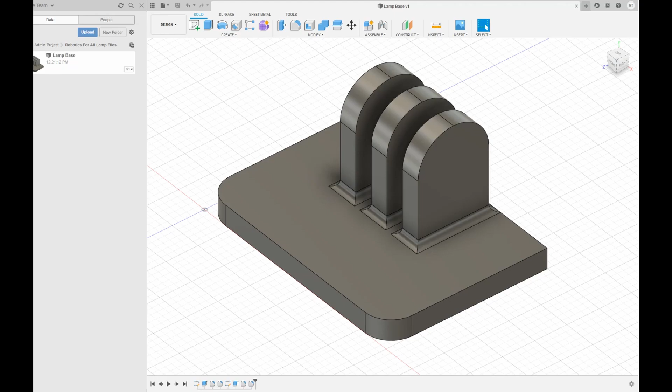This week we're going to learn about the process of assembly, which is taking various models you've designed and combining them into a finished product.

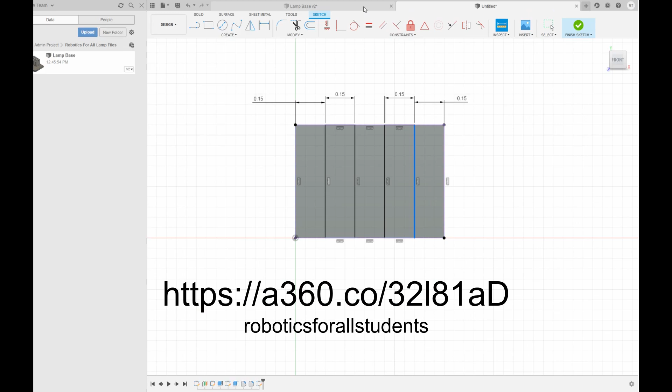In the video right now, you can see me designing the object I'll be demonstrating how to assemble. If you want to follow along, you can download the model from this link. The password to access this model is Robotics for All Students.

Now, there's a few schools of thought on organizing files for an assembly. The method I'm going to use here involves designing objects in separate files, then bringing them into a single file for the assembly. The advantage of this method is that you can create each object in a clean workspace, and you have access to the entire history of that object's design.

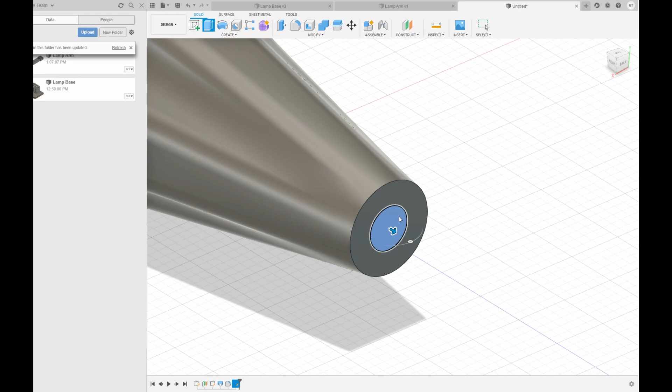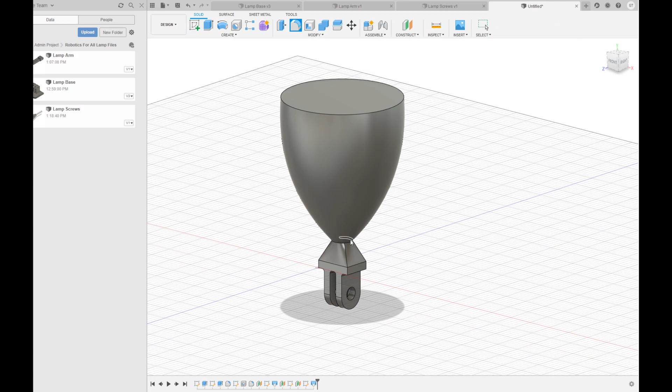Another method involves creating all the components for an assembly in a single project file, then joining them. This method makes sure that you will not have any missing links if a component is moved or corrupted, but you may lose access to that component's history. In this class, we're going to be using that first method for assembly, that way you can clearly see and modify each component before and during the assembly.

So here we have all the completed models for our lamp we're going to assemble today, but it looks like one of the arms is missing. We're going to need two of them.

So first of all, I'm going to show you how to insert a component in here. On the data panel on this side, you can see all the individual components. We have the arm, the base, the light, the nut, the screw, and the little name for it, as well as the file for our assembly.

Now, if I want to insert a component from a different file into this file, it's very simple. All I need to do is right-click and click Insert into Current Design. So let me do that. And here we go, we have a second one here.

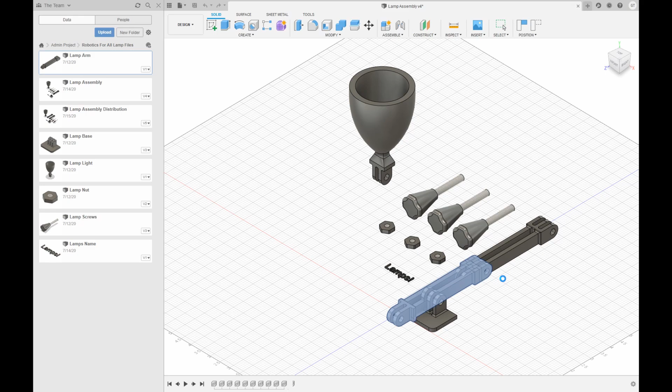Now, it's going to allow us to move it around, and it actually doesn't really matter where we put it, because we're going to constrain them together to complete the lamp. So I'm just going to put it beside it right there.

Now notice there's a chain link icon here beside every single component inside the hierarchy. That means it's linked to another file. So if we make a change in the original file, we can update the assembly to reflect that change.

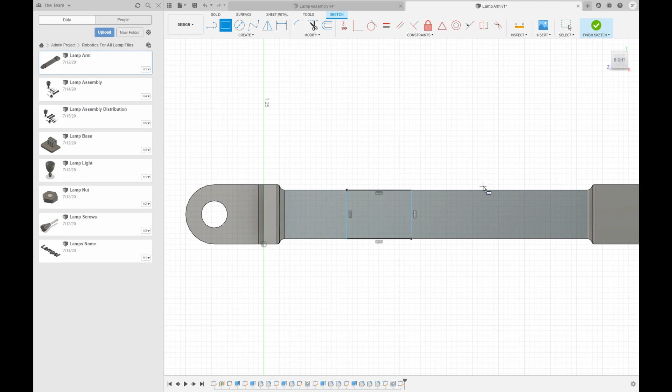So I'm going to demonstrate that really quickly. If I go to this lamp arm file here, and let me just make a quick extrusion on this side. Okay, now I've made a quick extrusion and a change on our lamp file here.

And notice, remember, we have access to the whole history of the file, so if I want to undo the change I just made, it's super simple. But watch, I'm going to keep this change here, and I'm going to save this file.

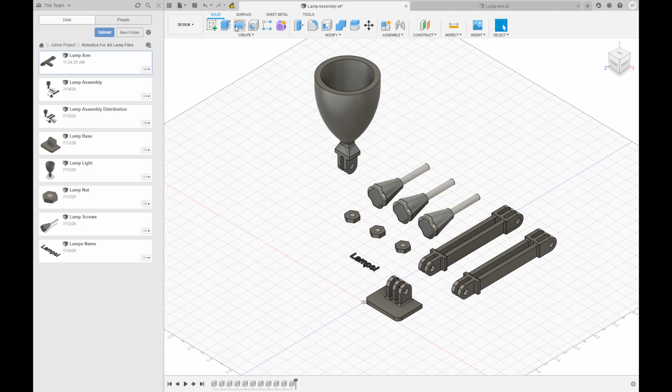Then, when I enter the assembly again, you're going to notice there's this exclamation mark above both of the arm components, and that means there's been some changes to those models, so we need to update it. There's a few ways we could do that, but the easiest way is to click this button right here. It says, click here to update all out-of-date references. So these references are out of date. We click it, and you'll see that they will update with that new little extrusion I made.

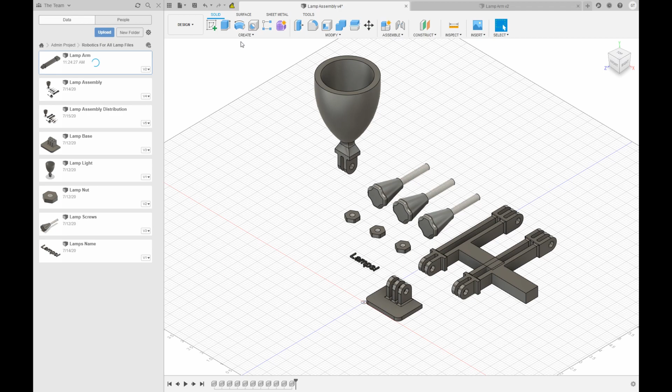Now, we don't really want that extrusion on there. It's not very helpful, so I'm going to go ahead and remove that. And you'll see if I remove that here, and then save my lamp file again, and come back in here, once again there's out-of-date references, so we click it, and they go back to normal.

Perfect. With all these components designed and laid out, I can now show you the different tools we use to assemble the components together. And in case you didn't know, the difference between components and bodies is that components can be freely moved because they have their own origin and degrees of freedom.

So all these pieces here are components because I can grab it and move it around freely. When we insert another design into a project, it's going to automatically become a component, and so we can manipulate it as a component.

Now, when we want to assemble the different components inside of a model, we want to go to the assembly menu right here. So there's a good number of tools here, so we're going to go one by one. So new component will create a new empty component, like I mentioned before, which you can use to create another model and make sure it's a separate component to the other components that might be inside your project.

But in this case, we don't need to use that. The ones we're really looking at today are going to be joint and rigid group.

So a joint is a tool that is used to connect two components together with some sort of particular behavior. A rigid group is similar, except it makes sure that their positions relative to each other are locked together.

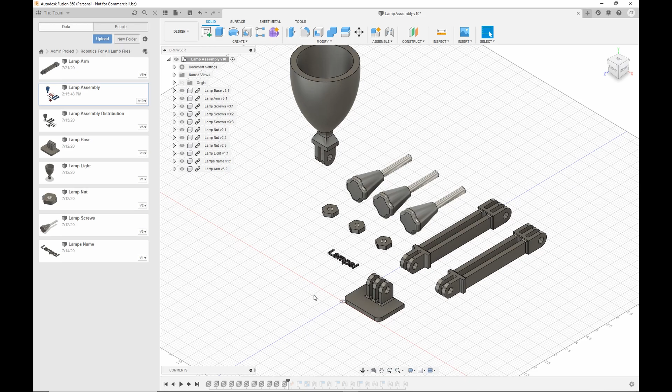Okay, now we have all of our pieces here in place, so we can now assemble our lamp model. The first step is to look at the base of the lamp here. This is the lamp base component, which we can find in our hierarchy. So what we want to do is ground it. I'm going to click the ground option right here, or I could also right click on it in the canvas and click ground.

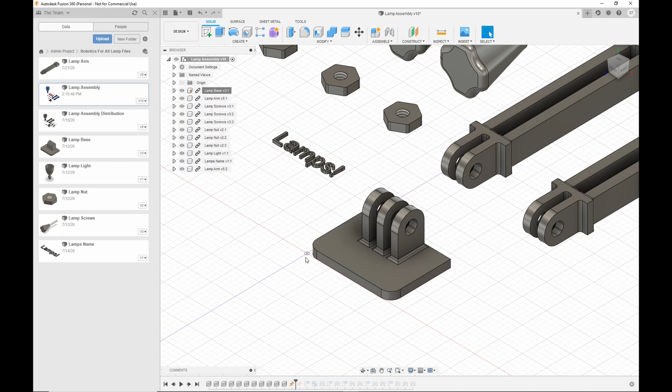What that's going to do is lock this piece in place so it can't be moved, and you can see it's grounded because of that little pin icon right there. It's important that we ground this piece because we don't want the base of the lamp to move at all. This is going to be a solid location where we can constrain everything else to, and it won't move.

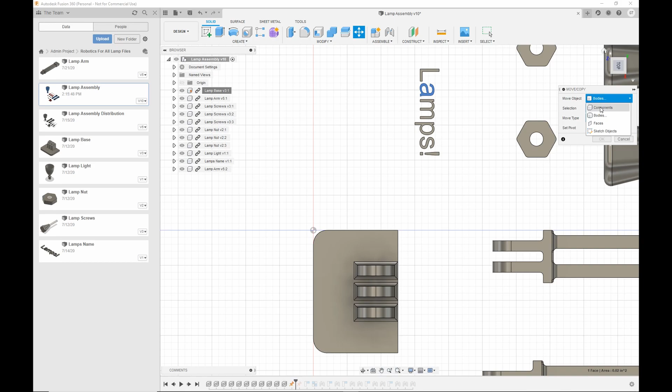The next thing we're going to do is take our lamp component here and constrain it onto the front side of our lamp base. So I'm going to go to the top view, get the move tool, and make sure we can select the entire component, not bodies, components. Now I can select this whole piece here. I'll use the square so I can drag it around, and I'll move it just here. Okay, now I'm going to check on this side. Let's rotate our view here.

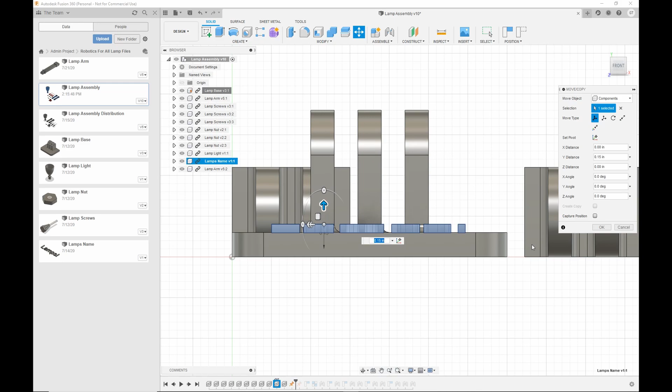Alright, yeah, we wanted to poke out just a little bit, so I'm going to drag it up. There you go, I'm going to click OK to confirm it. Now we've moved that lamp in place, but remember, we've only moved it, we haven't constrained it yet. So that means if I grab it, I can move it around, and that's not good.

So we want to constrain it together. How do we do that? Well, we're going to use the rigid group tool here. It's going to lock the position of our lamp to the position of the base. Because we moved the lamp around, it's going to ask us if we want to capture the current position or continue in the previous position. So we want to click capture position, and that means it's going to update the positions from what they were before to what they are now.

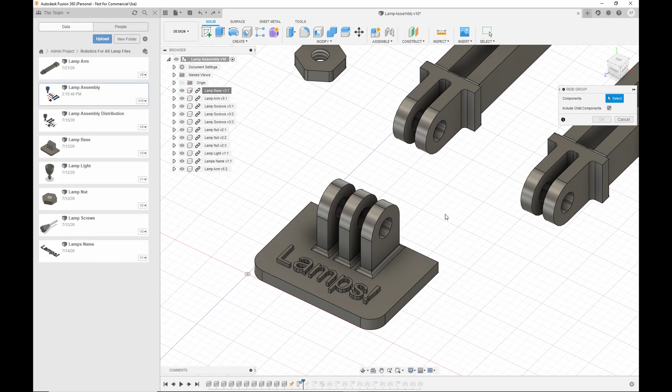Now we can select the components we want to become a rigid group. We want the base to be in a group with the lamp, and click OK, and now they're grouped together. You're not going to see any visual change, but you'll notice that I can't drag the lamp around anymore. The reason is, remember, our base is grounded, meaning it can't move, it's fixed in space. Because we've put a rigid group between our lamp and the base, it is now also grounded in place and cannot move.

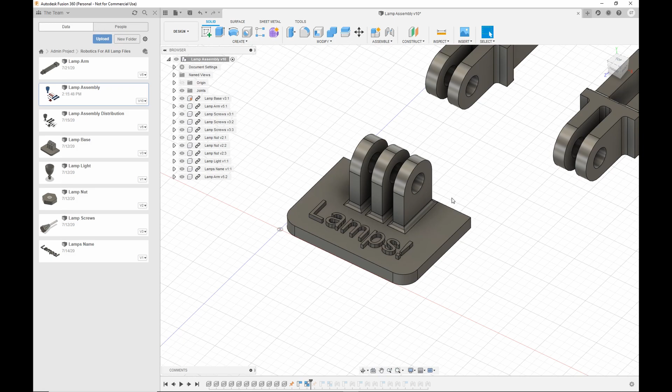Okay, now we're going to use the joint tool to assemble the rest of our lamp. First, I'm going to attach this first lamp arm. So I'm going to go up to the joint tool, the shortcut is J. Now I'm going to use the joint tool to attach our first arm to the lamp base. Notice that this is grayed out, and that's because the first component you select of the joint tool is going to be the one that moves. Because we grounded the lamp base, that means we can't move it.

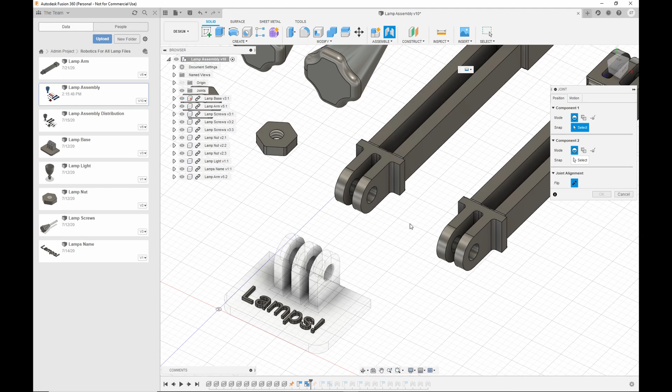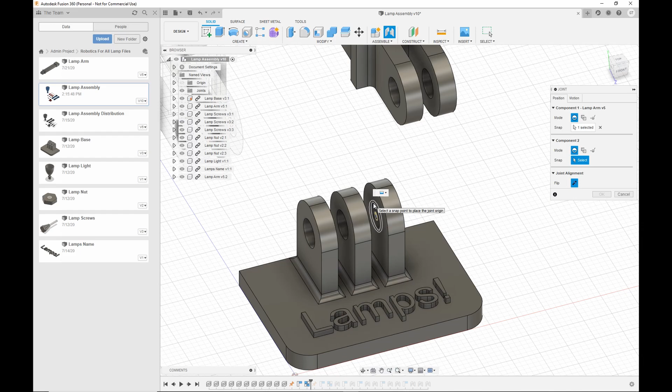So the first component we'll select is the lamp arm. I'm going to select this face, or this open hole right here, and that circular icon you see represents the joint origin. So when the joint is made, the circular icon I select here is going to be aligned with the circular icon on the second object. See how that icon appears again? Those two are going to be lined up, so you have to make sure they're going to be in the right place. Alright, now when I click it, see it drags into place.

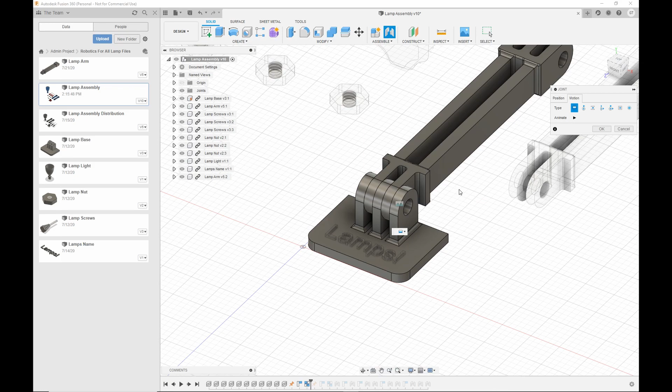Now that it's in place, we need to take a look at what type of joint we want. Currently, if you go to the motion category, it's set to rigid, and just like the rigid group tool, that means it's not going to move, it's rigid, it's stuck in place. But we don't want that, right? We want this lamp to be able to move and be pushed around. So instead, I'm going to select Revolute.

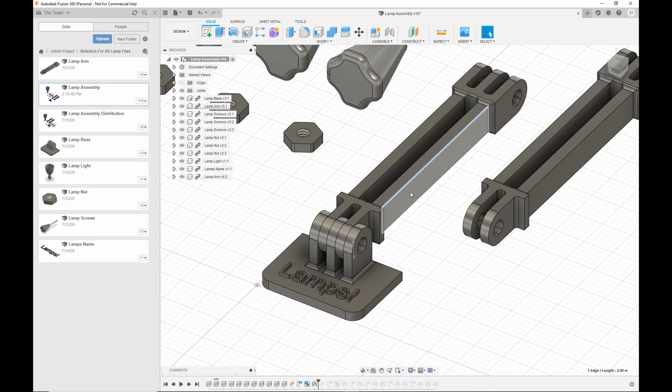That looks pretty good, but there's an issue where it seems to be going through the lamp base, which realistically isn't possible. Let's confirm this joint tool action. Now if I try moving this lamp, you'll notice it's constrained—it can only move in that one rotational axis. But it can still go inside of the lamp base, which is not what we want.

Luckily, in Fusion 360 we can create a joint limit for this revolute joint to make sure it can't interfere with itself. I'll right click here and go to Edit Joint Limits—you can also do this from the timeline. I'll click Edit Joint Limits and add a minimum and a maximum.

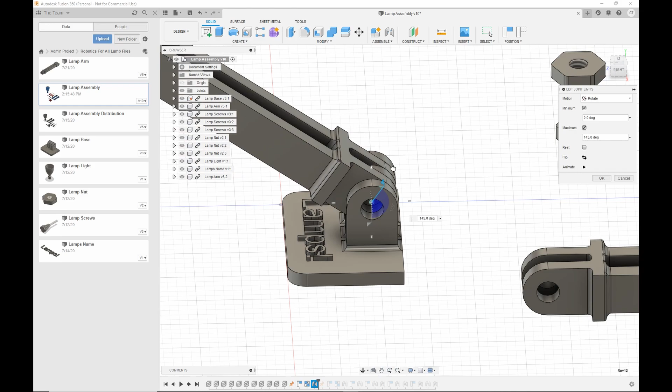Now we can drag each of these arrows to set the minimum and maximum positions. That blue area appearing inside the joint shows the range of motion allowed. I'll set this joint to be right about there, and set the minimum position a little further back. Now that we've added these joint limits, the top of our lamp can move properly.

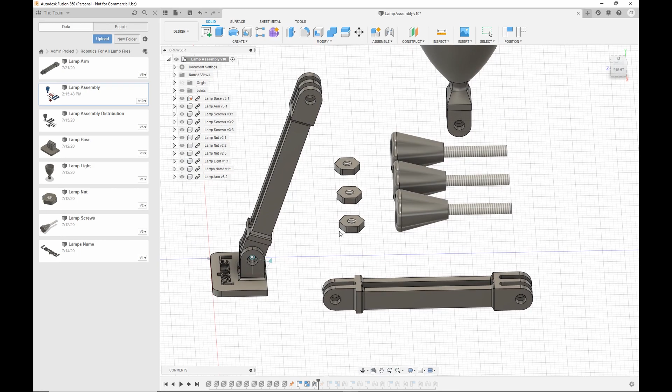The next thing we want to add is one of these screws. These screws need to be joined all the way inside this hole, because if you were actually making this, you couldn't just put the lamp arm in there—you had to have something to hold it all together. That's what this piece would do.

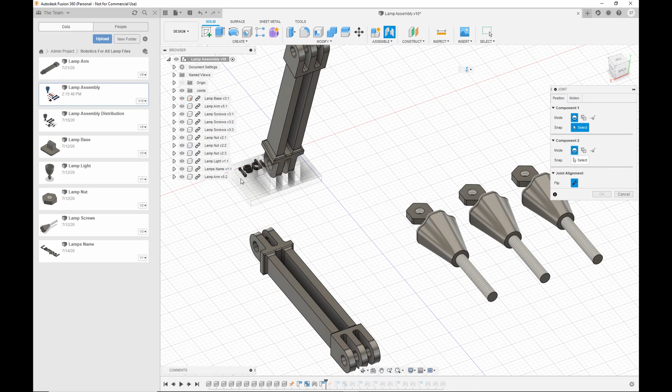We'll use the joint tool again to join our lamp screw into the base of the lamp through this hole. We'll select the position like before on the first component—I'm selecting this ring right here. That's the first position. Now for the second one, I want to put it right through this hole, so I'll select this edge. You'll see it slide in, and there you go.

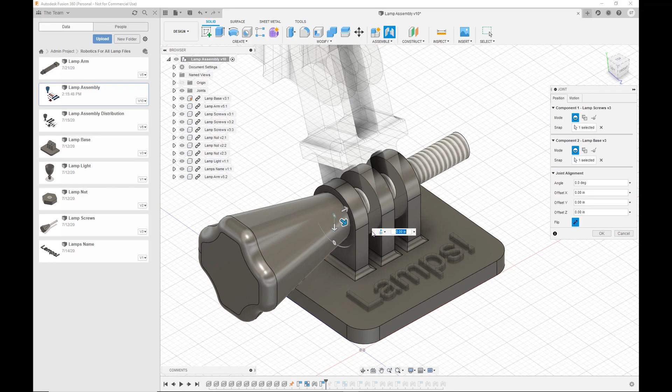Fusion 360 remembered what type of joint I did last time, which was the revolute joint, but that's not exactly what we want here. We want this to be able to slide in and out, so in this case we're going to use the cylindrical joint.

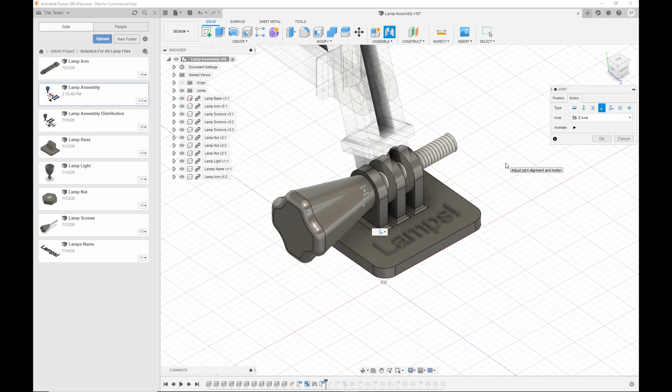There's a joint called a slider which looks right, but this screw is threaded—meaning it has threads running along the front—so in reality if you wanted to remove this, you'd have to screw it, you'd have to spin it. So we're going to use the cylindrical joint instead, which allows the object to translate along a singular axis while also rotating. That's what we want here. I'll click OK.

Now we have this screw in, which looks great, but uh-oh, that doesn't look good—we need to make sure the joint limits are set correctly. Let's do that from the timeline. I'm going to click Edit Joint Limits.

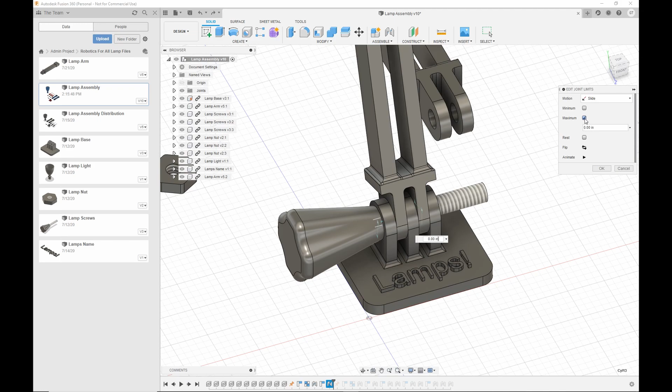Because there are two different axes of motion here—rotation and translation—you can change which one you're editing the joint limit for. In this case we don't really need a limit for the rotation, so we'll go directly to the slider and add a maximum, and a minimum too so it can't go through. We'll take that maximum and put it out about this far. Then click OK to confirm the joint, and there you go—now we can properly pull our screw in and out while rotating it as well.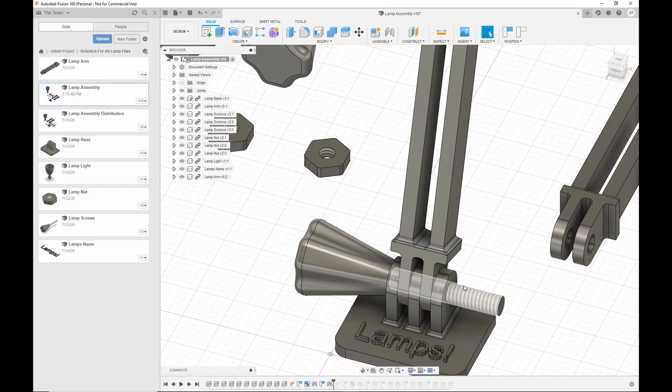Now we also have these nuts that we want to attach to the other side of the screw to keep it held in. I'll use the joint tool again, selecting this ring right here, and place it up against this ring right here. That looks pretty good.

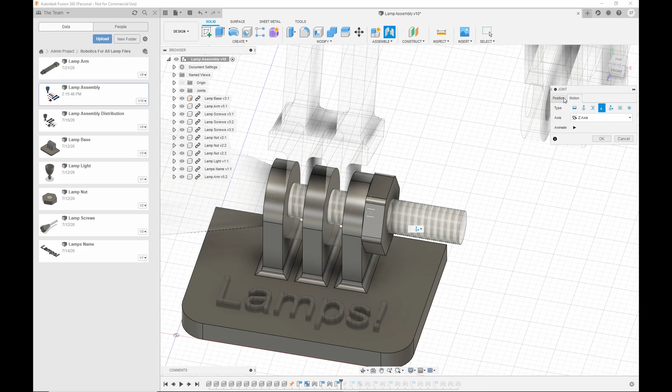Once again, because this nut is threaded, I think a cylindrical joint is quite appropriate—it allows it to spin and be pulled off of the other screw. Let's click OK. But once again we have that pesky joint limit issue, so let's set that with Edit Joint Limits, adding a minimum and a maximum.

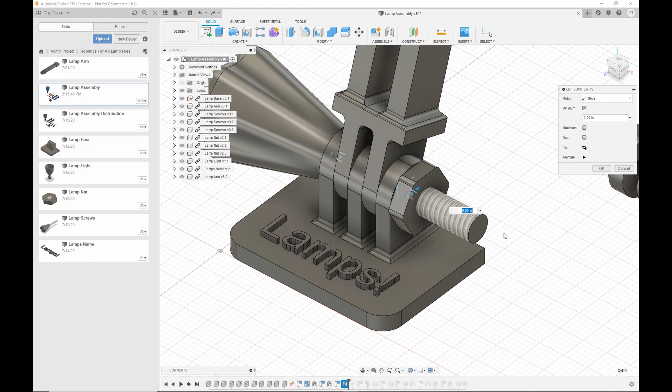Oh, I forgot to change this—we set a minimum and maximum for the rotation, but we don't really need that since we want to be able to rotate as much as possible. We only need to set the limits for the slide. So I'll activate a minimum and maximum for the slide, and drag the maximum out here.

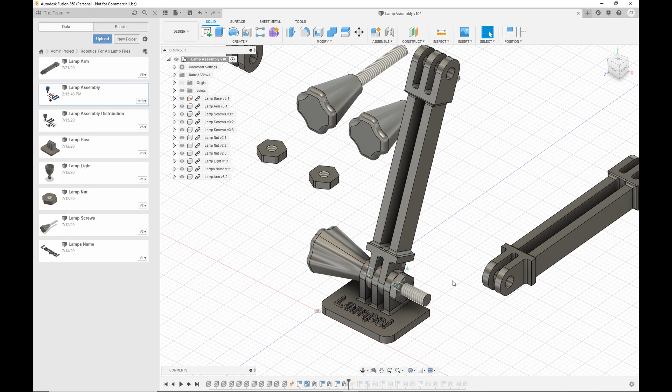And there you go, now we can properly rotate this and slide it in and out. Now we have the first bit of our arm for our lamp constrained. We can move this around, and we can rotate and spin this out, as well as the nut, which is good.

Now let's go ahead and start constraining the other lamp arm here. So I'm going to go back to the joint tool, capture position. This will be the same constraint as our other arm here, so in this case I'm going to make it a revolute. Go to second option, revolute joint.

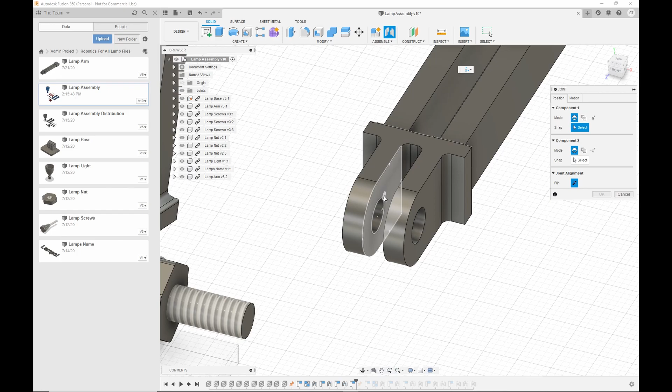Now I'm going to change up which face I'm going to use. I need to restart the tool there. Capture position. All right, I'm going to use this ring right here instead, and make sure we're on a revolute joint.

For the second component, we're going to select. Now let's see, we chose that inside face there, which is going to be up against this one here, so I'm going to go in here and click on that. There you go, that looks pretty good.

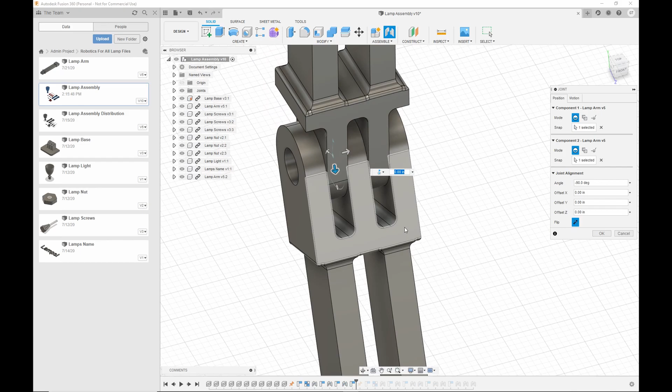Oh, but it looks like we're having some issues there with the joint limits once again, so let's go ahead and jump in there to fix that. So we go ahead and edit joint limits.

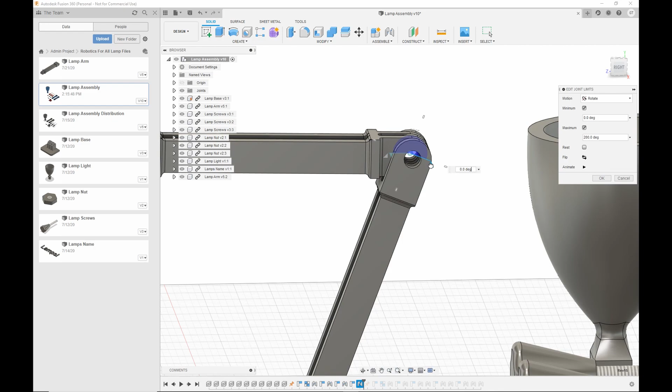We're going to add a minimum and a maximum, and we're going to turn this one all the way around, just about like that. Let's see if that looks right. Yeah, it looks pretty good. Now we're going to set the maximum as well to be all the way back there. That looks pretty good, I click OK.

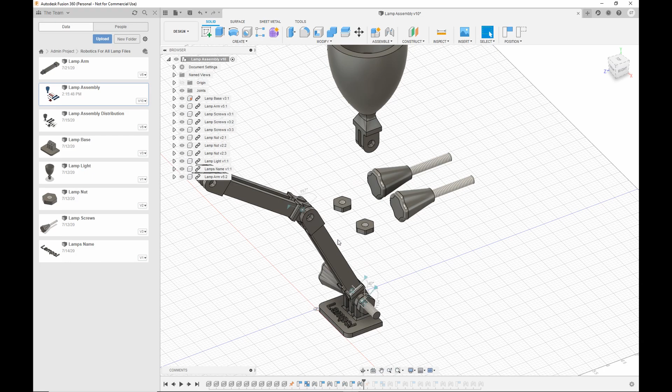All right, now we have both segments of our lamp's arms here, and you'll notice Fusion 360 is really smart when you have multiple joints. So you can move them just like the motion you'd expect to have in real life. Here you can see me realistically moving both the joints on the arm like that.

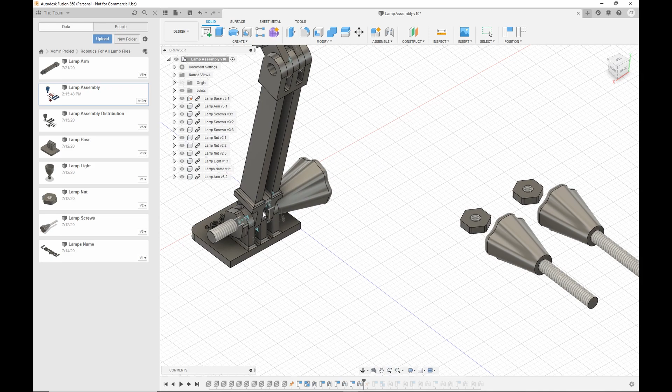Pretty neat, isn't it? All right, let's go ahead and put in these other components here. Now, in reality, if you're CADing this for somebody else to design and discover how your thing works, you might not want to have a cylinder joint on every single one of these. Maybe just one so you can demonstrate its ability to be removed, but on the others, perhaps you want to keep it just in place and not be able to be moved. So in this case, we're going to use a rigid joint here.

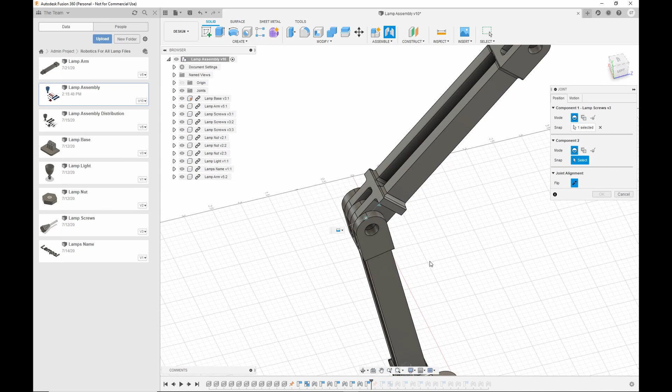So we're going to use a rigid one. I'm going to select the first component, which will be this face again, right there. Now we're doing this middle one here, so I'm going to put it on this side. And that little shaking animation shows you that they're locked together.

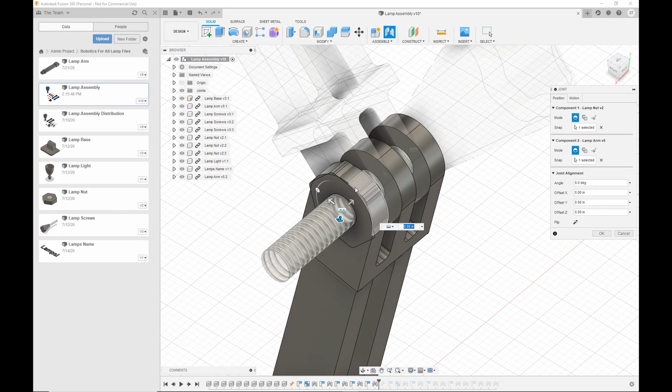Okay, and then I want to put the nut in as well. Now look at that, that's a strange issue. When I try to join them together, it looks like the nut is inside of that top clasp on the lamp arm. That means I need to select the other face of the nut as I'm trying to constrain it. So the top face of this didn't seem to work, so I'm going to go ahead and go back into the joint tool.

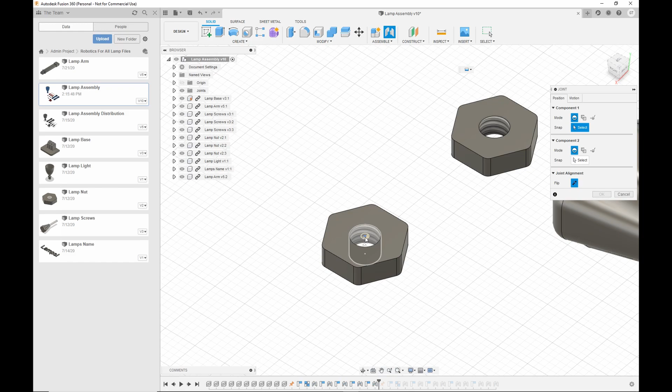A neat little trick if you have a cylindrical thing here is you can hold Alt on your computer, and you can shift between the different faces of that particular feature. So in this case, we're going to select the bottom one instead of the top. Now we go back over here and we click here. And there you go, now that looks like it's locked in place.

Now remember what I said about these joints, they only lock movement relative to each other. So even though I've placed a rigid joint on these, they're still going to be able to be moved by the whole thing. The whole object can be moved, but these will not be moved relative to each other.

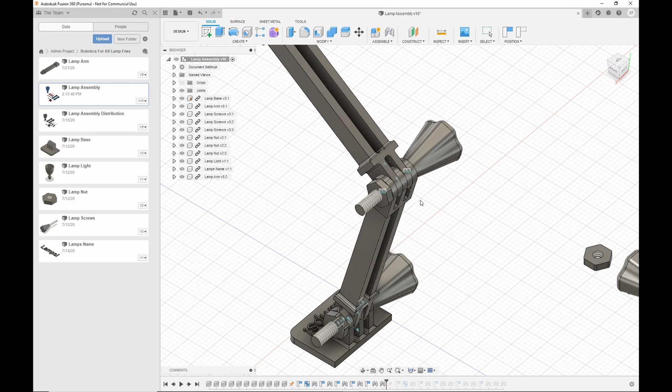Okay, now it's time to put in the final bit of the lamp, which is the actual bulb itself. This is going to be very similar to the other lamp base. I'm going to go ahead and use the joint tool. Now this one should also be able to rotate like the other lamp's arms, so it's going to be revolute.

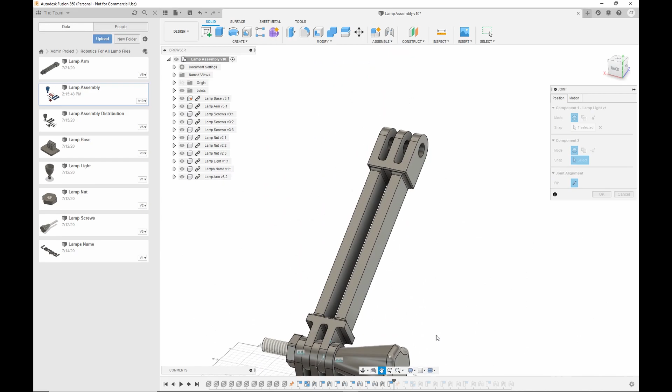I'm going to select the first component, and I'm going to use this interior face there. All right, so then that interior face, let's see, over there, so it should be this face right here.

There you go, that looks pretty good. Alright, now what we want to do is set some joint limits, because right now your lamp can go inside itself, which you really can't do in real life—unless you have a really special lamp, that is.

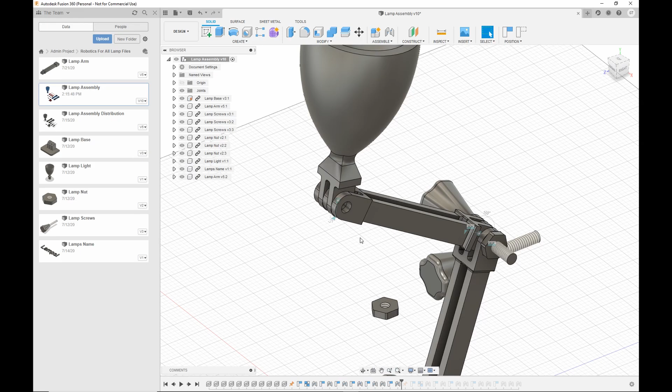Let's go ahead and edit the joint limits here. I'm going to add a minimum and a maximum, then rotate this all the way around. That looks pretty good. And this one I'm going to rotate down here—that looks good too. Press OK. Now we've got proper joint limits set up.

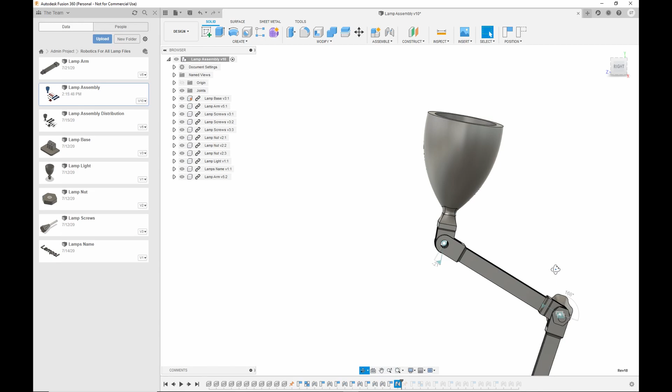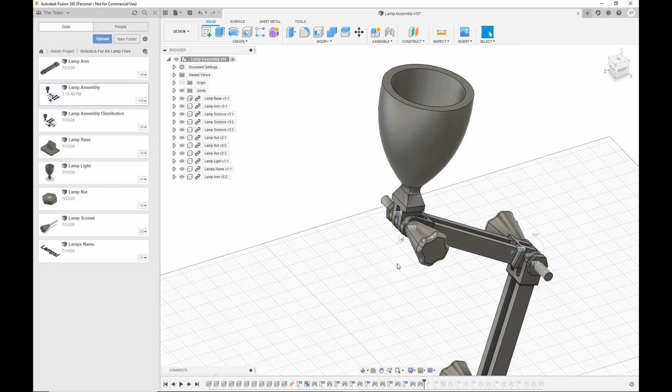If we take a look at our whole model here, oh, let's not forget this last screw though. I'm going to go ahead and put this in as a rigid joint as well. Okay, now we have both the third and last screws and nuts attached. So if we take a look at our entire model here, it's looking pretty good.

Now we can actually properly move it around, just like you'd be able to manipulate maybe a desk lamp or something similar with all these little bits here. Alright, that looks pretty good.

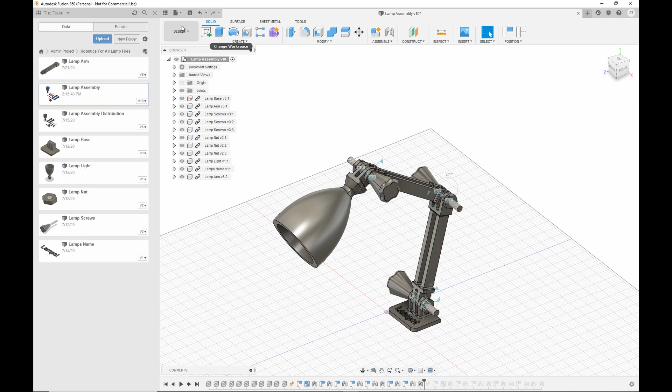Once you finish designing a model and assembling it, what if you wanted to create a high-quality image of your creation? Fusion and many other modeling programs have a workflow for that called rendering. To render an image in Fusion, you need to change your workspace into the render workspace—come up to where it says Design, and go down to Render.

Ooh, look at that. You can already see it's rendering the image of our lamp in a slightly higher quality version here, but we can have even more control over it. Before that though, let's go ahead and try editing the material and appearance of our model, and then render the final image.

When you click the appearance menu in this little color wheel here, you'll see a menu of all these kinds of materials and colors you can apply to your model to give it some unique appearances. In this case, I'm going to make it out of aluminum, which is a pretty common metal you might see something like this made out of in real life.

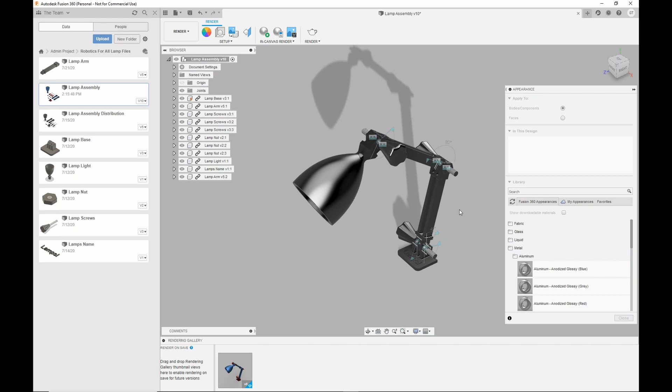I'm going to go for blue and red because that looks cool. So I'll put blue for the lampshade there, and make the arms red. You can just click and drag it off of this browser and put it in here.

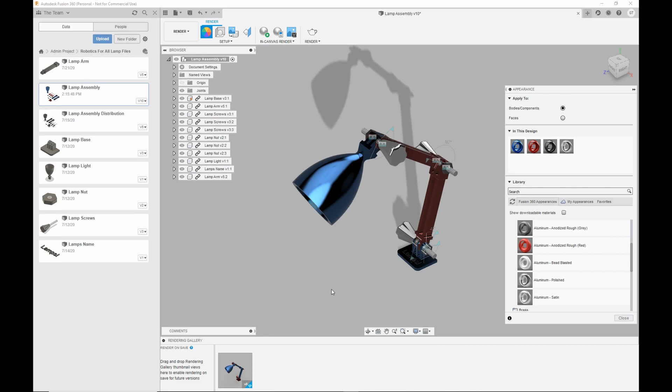So once you have your materials properly set up on your model, you can go ahead and click this teapot icon up here to render an image of your model.

Now there's two different ways to render it: a cloud render or a local render. A cloud render uses an external server—so if you have a student account attached to your Fusion, you should be able to render this an unlimited number of times as a cloud render, without taxing your local hardware. Otherwise, you can use a local renderer, which will render it on your computer itself.

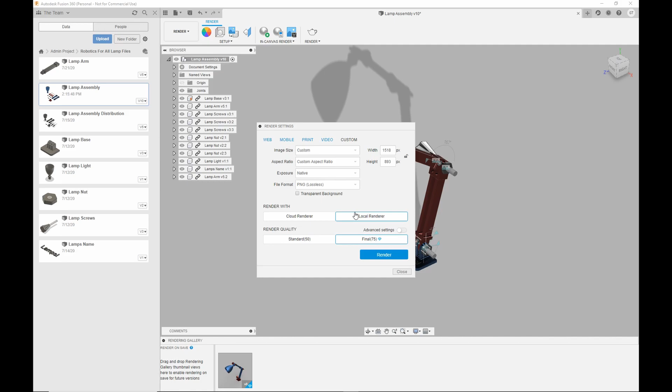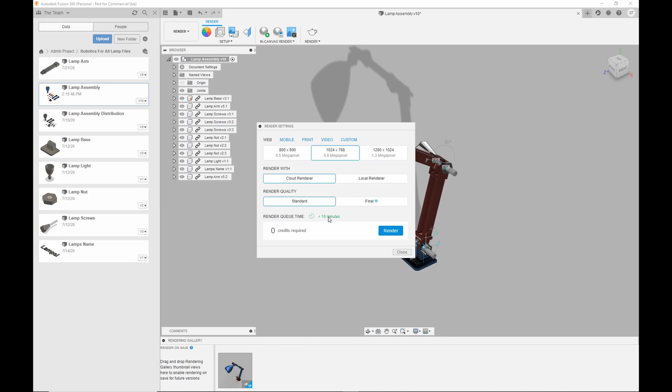Normally when we render an image, we go to web mode over here. We choose 0.8 megapixel, then make a choice between cloud render and local render. The render quality between standard and final just determines how long it's going to take and how much detail goes into it. In this case, we're going to render an image using standard quality as a cloud render, and you see it gives an estimated time of less than 10 minutes.

Alright, when everything's set up and you're ready to go, you can click this render button. Inside your rendering gallery, you'll see it start the rendering process—a bar will appear that tells you when it's done. We're going to wait for this render to finish and see what the final image looks like. Okay, our render is finished.

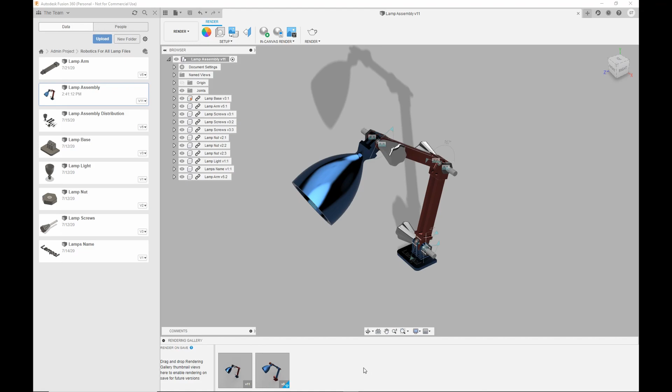We can click on it, and you can see the high quality image of our object. Maybe next time we could get a little closer so the object's bigger, but as long as you move the camera around inside the scene, you can get as close as you want to the object, change the angle, and make sure it looks exactly how you want it to be.

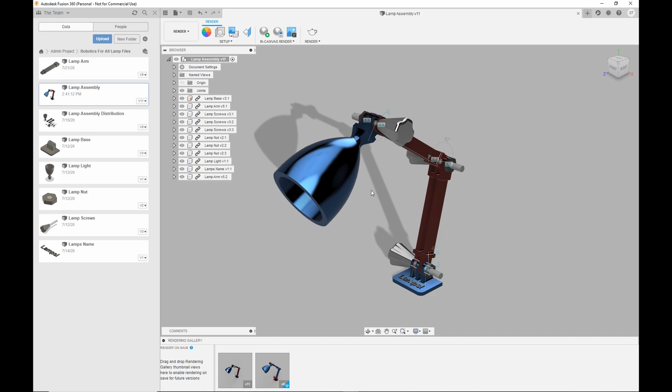And you can even manipulate it like that if you wanted to change its position. But yeah, that is how to render and assemble your objects in Fusion 360.